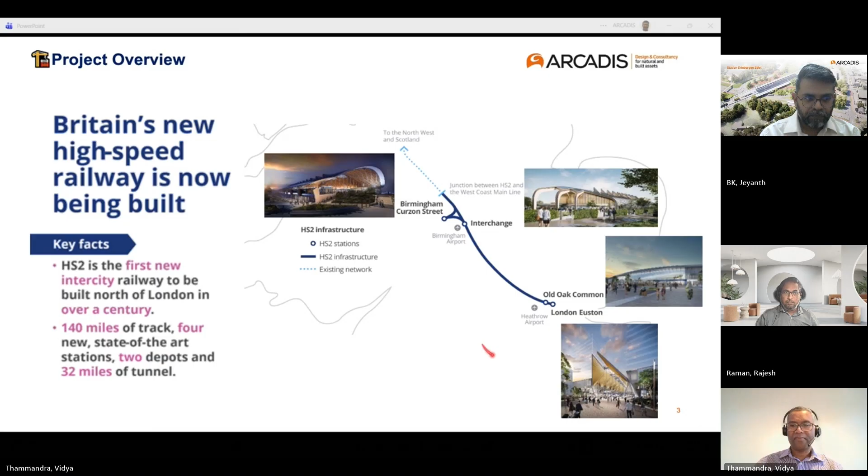This is the architects' expectation of High-Speed 2, this Birmingham Curzon Street station. You can see the Birmingham city skyline in the backdrop. What is striking here is the old Curzon Street station building. Maintaining sightlines to this heritage station building formed a key part of planning consent.

There are 7 lines running from east to west, supported by 4 viaducts. The overall length of this station extent is about 460 meters long. Half of the length on the western side is covered. The western concourse is located above the viaducts, and eastern concourse is located below the viaducts. The station is served by the Midland Metro Alliance tram line, and you have a taxi rank and other services located on the eastern side below the viaducts.

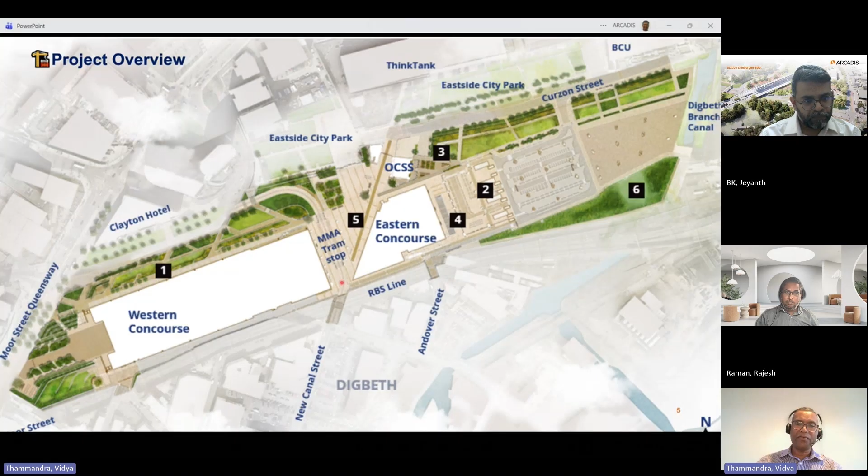This is the site map, and this is the old Curzon Street station building. Maintaining sightlines to this station building from this new Canal Street was a key planning requirement. You have the MMA tram line running north-south, and you have western concourse here and eastern concourse here.

The whole detailed design work package is divided into several sub-packages, and you can see different elements of the station building. At a lower level, you have the control room and key functions essential for running of the station, and it also supports all key building services. On the eastern side, you have the eastern concourse and some back-of-the-house plant, and you have a taxi rank at the eastern end.

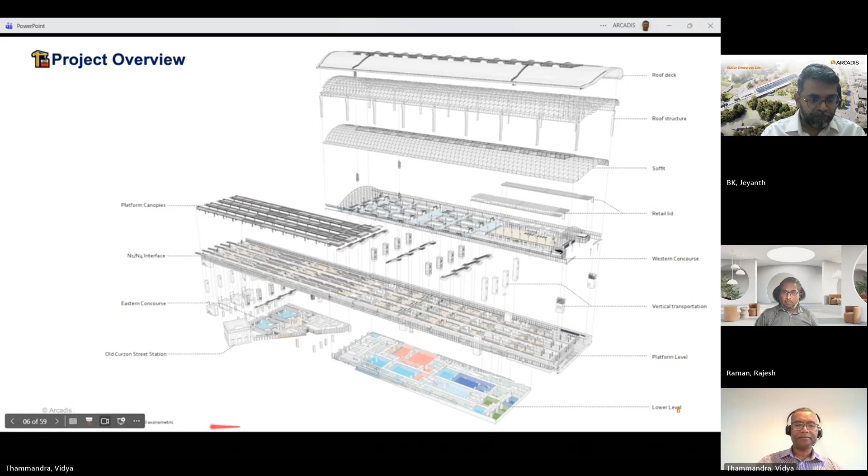This is a structural BIM model. This is a detailed view of the station looking towards west. You have these viaducts formed by precast pre-tensioned U-beams supported by portal piers. Then you have these platforms which are monolithic with the viaduct deck slab, and then you have concourse beams directly resting on diaphragm beams of portal piers. And you have this roof structure which is supported by steel buttress columns supported at the ground level.

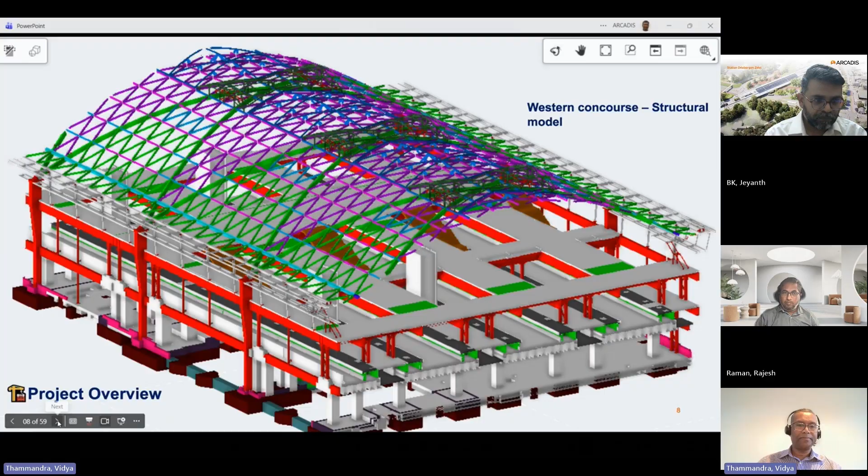This is a section through the building. You can see the viaduct deck cross section here, and these concourse columns, which are located about 5 meters away from the track center, mainly from derailment impact considerations. The platform walls are designed for derailment impact. And you can see the lift shaft here, supported by these edge beams, which run from diaphragm to diaphragm.

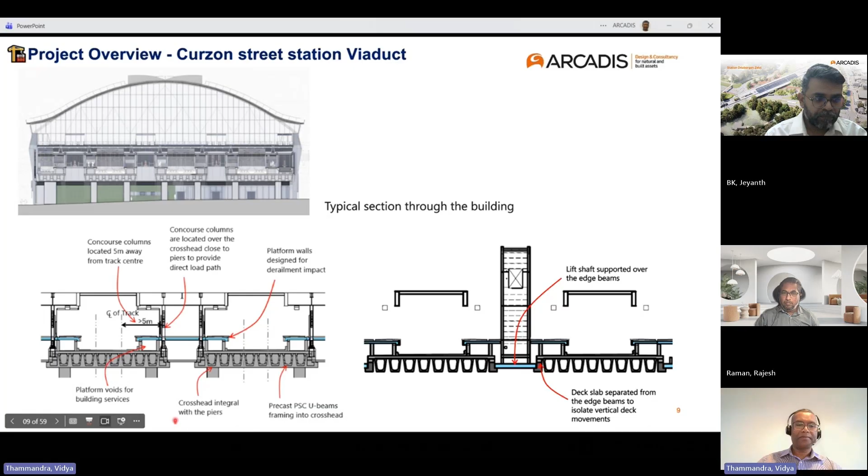This is a bird's eye view of all the viaducts. You have 3 northern viaducts supporting 2 tracks each, and then a southern viaduct supporting 1 track. And you have about a 60-meter length supported by piled rafts. And you have a transition span at the eastern end, which divides the Curzon Street station building, station viaducts, from the approach viaducts.

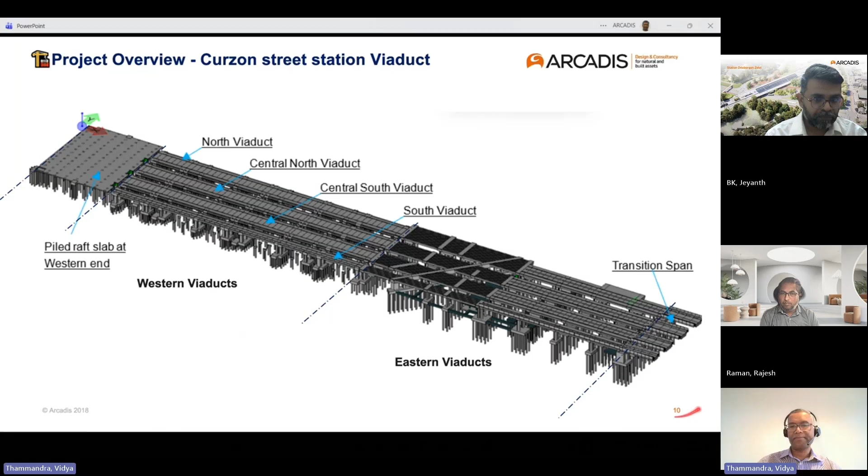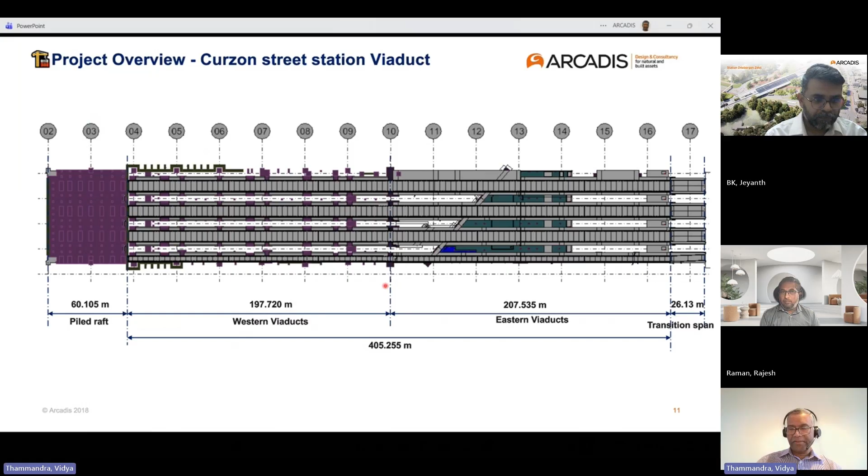This gives the spatial extent of individual viaducts. Western viaducts and eastern viaducts are roughly about 200 meters long. And then you have here the tram line and New Canal Street.

The key requirement was to eliminate bearings inside the station building. So the only place where we could locate the bearings is the junction between eastern and western viaducts here. This is outside the building, next to the tram line, and towards the eastern end of the viaducts, and of course under the transition span.

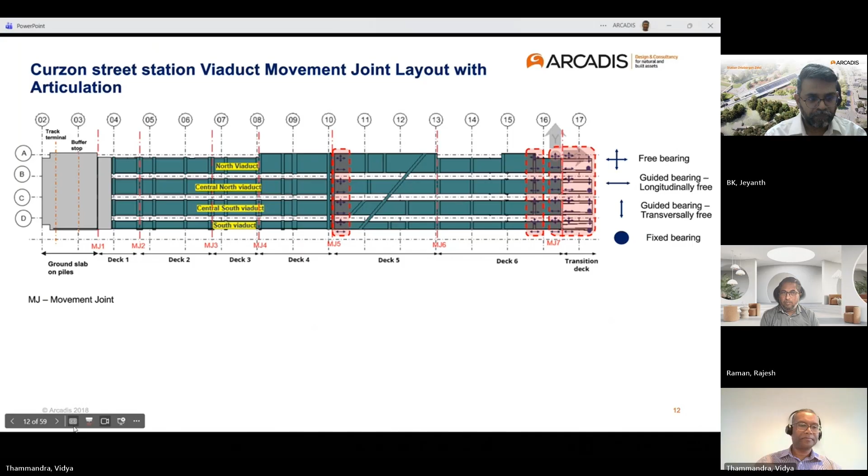This is the longitudinal section. You can see a number of movement joints, particularly on the western side. The movement joints are typically formed by twin columns supported on a shared pile cap.

The only place where we could locate the bearings is at this grid line, which is the junction between the eastern and western viaducts. There's only one movement joint on the eastern side, within the station building. Again, this movement joint is similar to that on the western side, where the deck is integral with the piers on both sides, but the deck itself is separated here. This is the transition span, fixed towards the eastern end and with free bearings on this side.

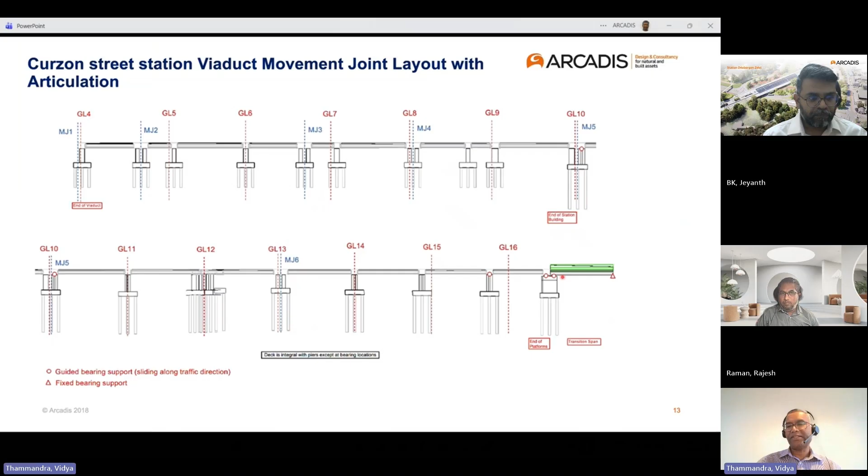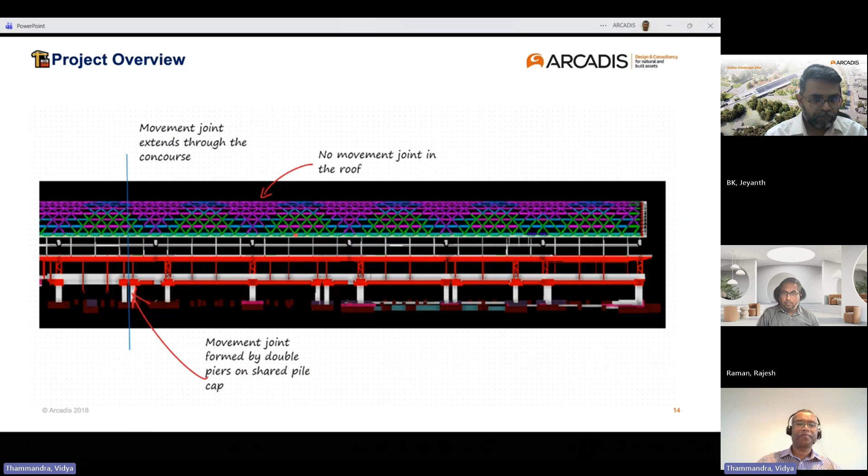The movement joint within the viaduct extends through the concourse, but there is no movement joint in the roof. So this is again a key feature of design.

This shows the typical construction of viaducts, the precast pre-tension beams. They are brought to site, supported on temporary trestles, before they are made integral with diaphragms. Then this span-by-span construction continues from west to east, governed by site constraints.

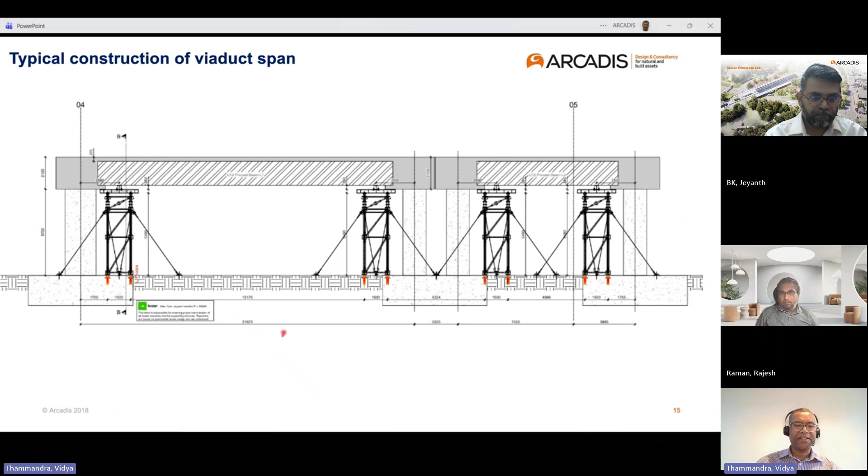As I explained, we need to maintain sight lines to the old Curzon Street station building. So though the columns are located parallel to this New Canal Street, this formed a colonnade and frontage for the eastern concourse.

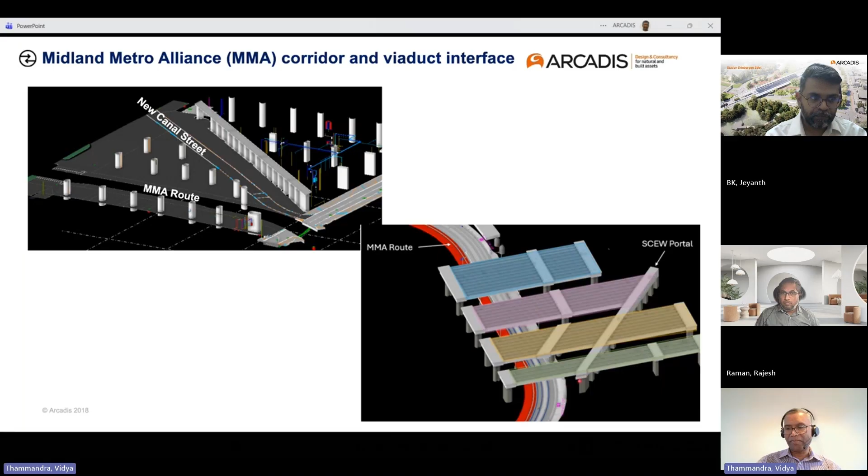Because of the requirement of the tram line, the piers supporting the viaduct are located at a certain distance from the tram line, and the overall arrangement resulted in some skew spans.

This shows a bit in detail. Because the maximum length of the beams that can be transported to site is about 28 meters, we had to come up with some intermediate piers and intermediate diaphragms to break the span.

And because of the arrangement of the piers along New Canal Street, it also resulted in some skew spans. All the substructure and superstructure here is integral, except here where it's located on bearings at the western end of the eastern viaducts.

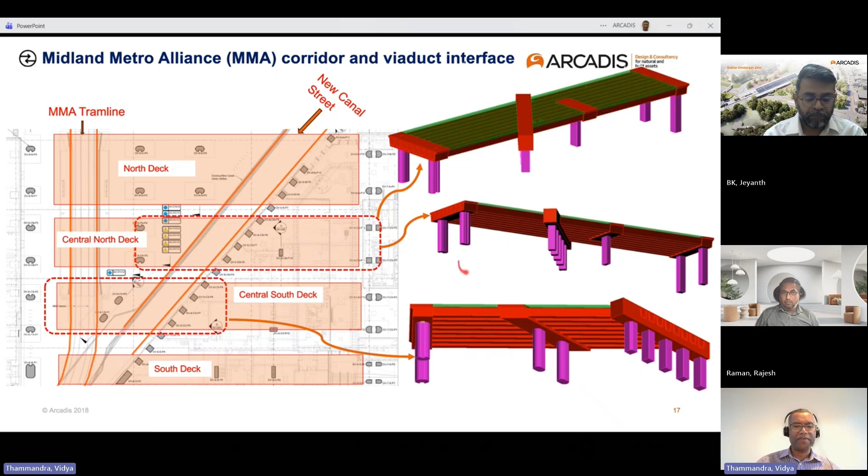This is a cross section of the deck. There is a waterproofing layer in the deck, and a waterproofing protection, like a concrete protection layer, and then a slab track. There's an intermediate layer that directly rests on the concrete protection layer, and then you have the track slab supporting the rails.

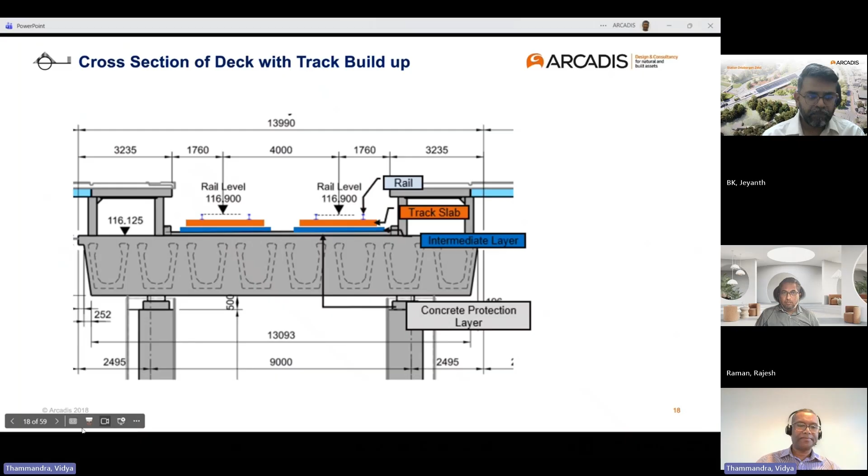This is the design criteria. The design speed is 100 kilometers per hour, so it's not quite a high-speed viaduct designed for high-speed trains. The design criteria is similar to that of any other network rail bridge, because the speed is less than 200 kilometers per hour. Designed for standard LM71 and SW0.

The dynamic loading and natural frequency limits follow EC1-2, except for derailment impact loading, which is governed by HS2 standards. All tracks are continuously welded rail tracks, CWR tracks, with no rail expansion joint within the station limits. This governed all the rail-structure interaction and careful consideration of rail stresses.

It's integral construction, with no bearings inside the station building. That required challenges associated with the temperature loading, creep, shrinkage, and all those effects.

Again, the western part of the station, because of the expected potential rise of groundwater level, is designed as a grade 3 basement. So the basement slab is integrated with the pile caps of the viaducts, and that was again another design challenge.

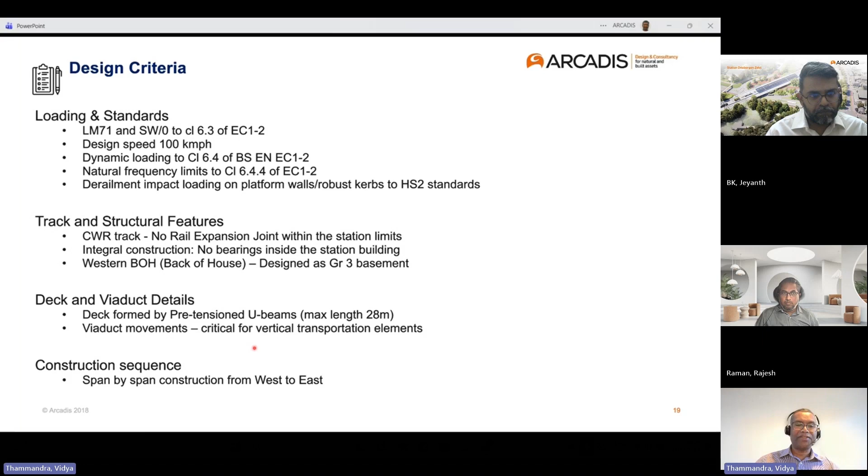Because of the integral construction, temperature loading governed the design. To mitigate those temperature load effects, we proposed a concrete mix with limestone aggregate, which allows the use of a reduced coefficient of thermal expansion compared to normal aggregate.

Because of the size of the concrete elements and the seasonal nature of the temperature effects, we proposed to use a long-term modulus equal to 75% of the short-term modulus. This is suggested in a book by Robert Benaim - you can see the reference here.

We built this into the AIP and got approval from HS2. Because the whole viaduct structure comprises reinforced concrete and pre-stressed elements, using reduced, cracked stiffness for RC elements - mainly the piers and diaphragms - also helped to come up with realistic temperature loading. Also, for long-term load cases like differential settlement and long-term shrinkage, we used a long-term Young's modulus considering creep.

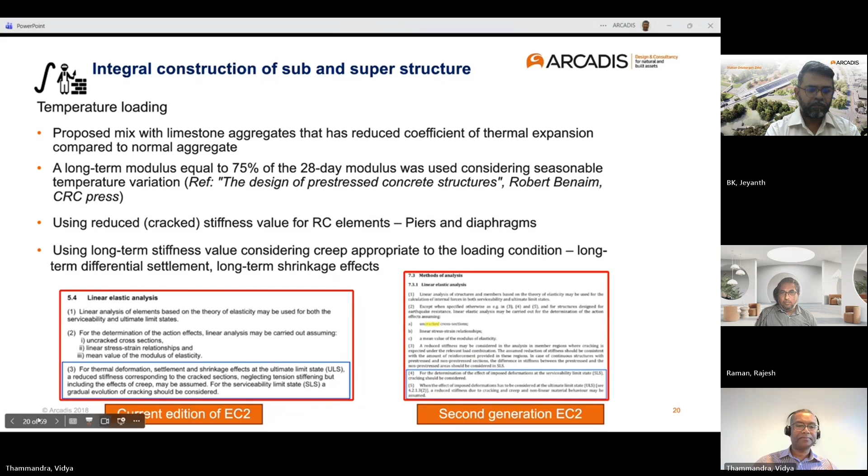I'll now give it to Rajesh to take you through the modeling strategy and global analysis.

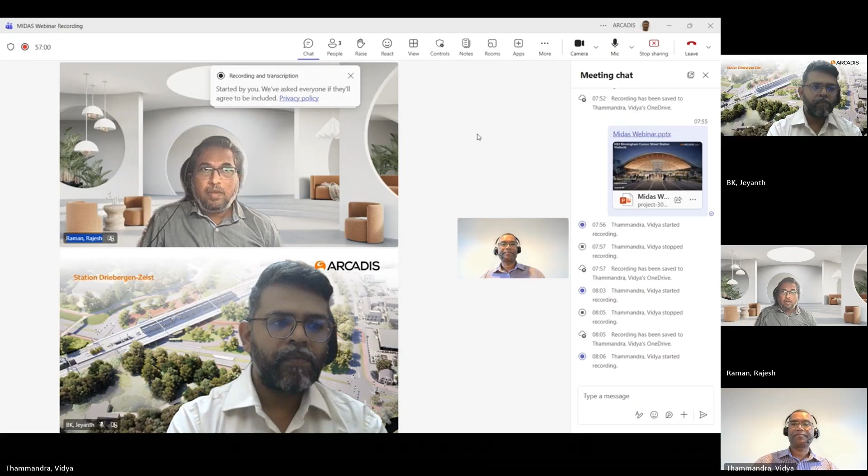You can request control, Rajesh. Requested. Yeah, okay. You can see, right? Yeah.

Thanks, Vidya, for this. I'll be taking you through this modeling strategy and the workflow of global analysis.

As explained earlier, the structure is bifurcated into eastern and western sections. This is the western viaduct, which has a total length of around 195 meters, separated by movement joints at 3 locations. The maximum integral span is around 65 meters here, as this entire viaduct stretches within the station building. No bearings are provided, and the piers are either square or rectangular in shape.

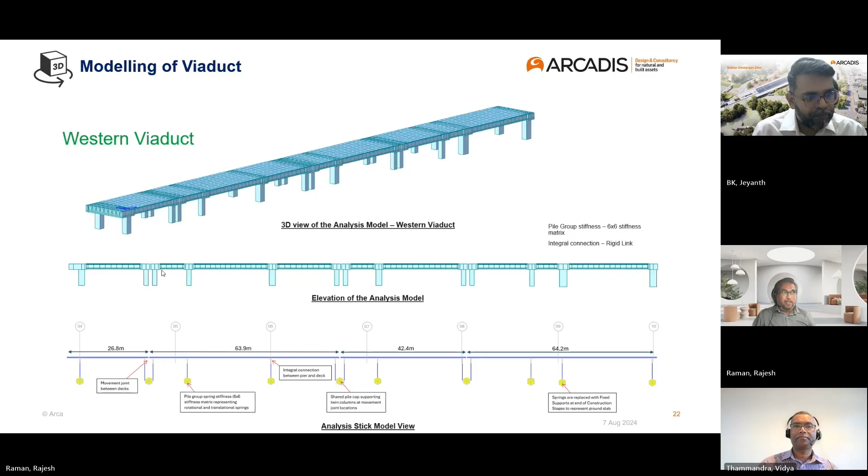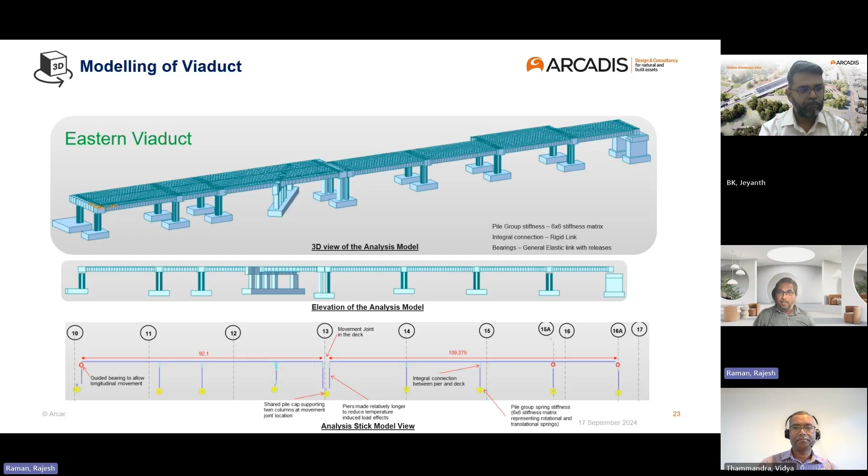This is the model showing the eastern viaduct. Here there are some spans with skewed diaphragm and pier due to the existence of canal street, highway, and tram line passing below. The total length is around 200 meters with a maximum integral length of 90 meters. In this viaduct, the bearings are proposed at locations outside the station premises. Also, the pier shapes are governed by aesthetics to accommodate drainage and downpipes.

All this viaduct configuration was modeled using MIDAS Civil with a combination of grillage and finite element techniques to capture the structural behavior accurately. So this is the grillage model snips.

This consisted of pile caps, piers, and diaphragms, all modeled using beam elements. The deck system was simulated as a composite element integrating precast U-beams with cast-in-situ deck slab to reflect the composite action. Plate elements were also used, incorporated solely to facilitate accurate load distribution to longitudinal beams without contributing to global stiffness.

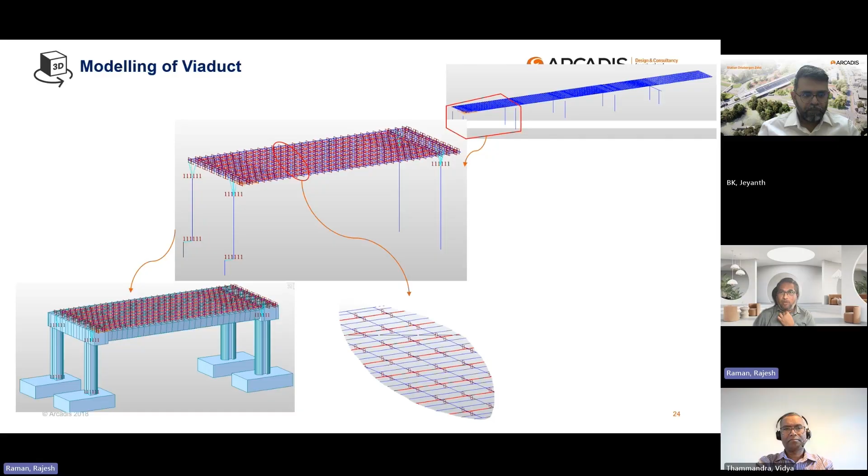The material properties accounted for concrete's time-dependent behavior, capturing creep, shrinkage, and age-dependent modulus. Boundary conditions were modeled using a pile 6 by 6 stiffness matrix. The connections at integral locations were modeled with rigid links, and at bearing locations, with elastic links. At the beam-deck interface, elastic links were provided to simulate interaction and accommodate differential behavior, which I'll show on this slide.

Post-deck, after the deck is cast, elastic links are introduced between the beam nodes from the longitudinal grillage and the deck nodes. These links act as stiff transverse outriggers, as you can see here, enabling effective load sharing across adjacent beams. This modeling approach ensures uniform distribution of transverse loads across the longitudinal beams, enhancing structural efficiency and serviceability.

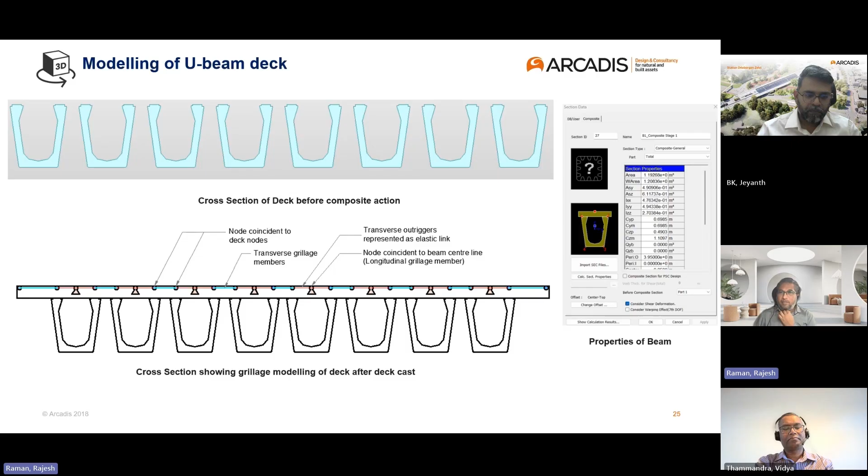This methodology is consistent with principles outlined in E.C. Hambly's bridge deck behaviour. This is an isometric view of one of the four-span viaducts analyzed.

To simulate realistic structural behavior under service and ultimate conditions, cracked stiffness properties were incorporated into the model. Piers and diaphragms were assigned cracked stiffness throughout the analysis to reflect reduced flexural rigidity due to cracking under sustained loading. For the deck slab, cracked stiffness was applied only under ultimate limit state conditions, aligning with design code provisions and ensuring a conservative assessment of load effects.

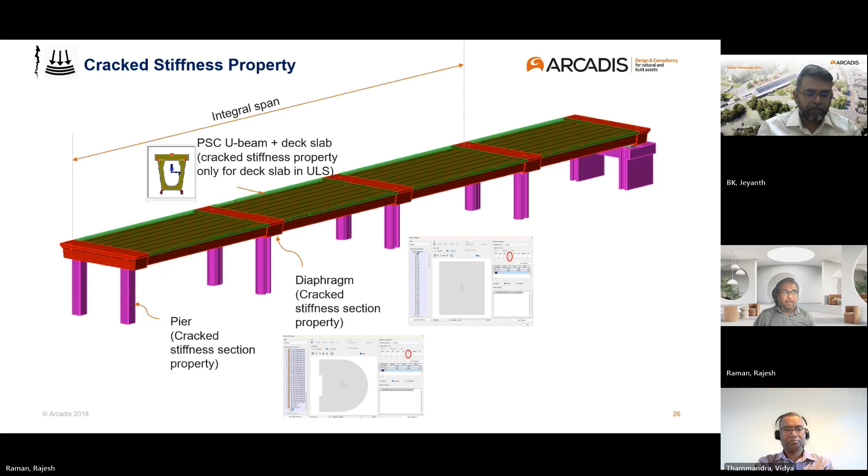The pile group beneath each pier was modeled using a 6 by 6 stiffness matrix within the general spring supports framework in MIDAS Civil, accounting for 3 translational and 3 rotational degrees of freedom. We carried out a sensitivity analysis to account for uncertainties in soil stiffness and pile-soil interaction, with a lower bound stiffness of -30% and upper bound stiffness of +30%. These bounds were analyzed using actual spring elements in MIDAS to evaluate the impact on global structural response and foundation performance.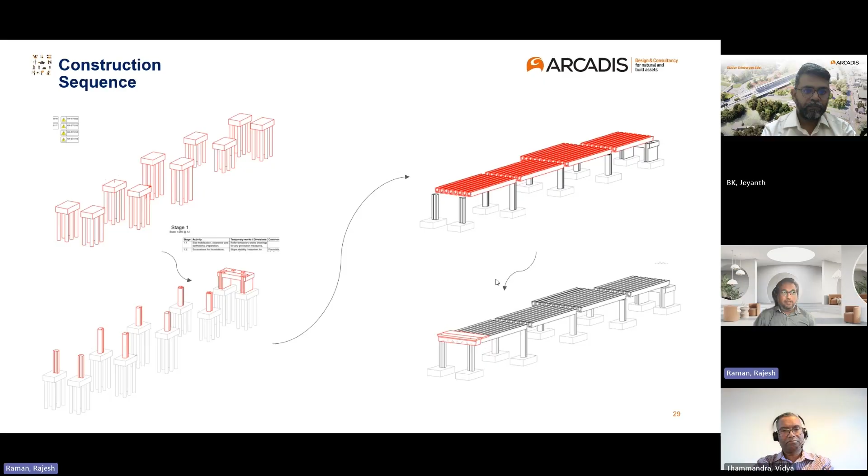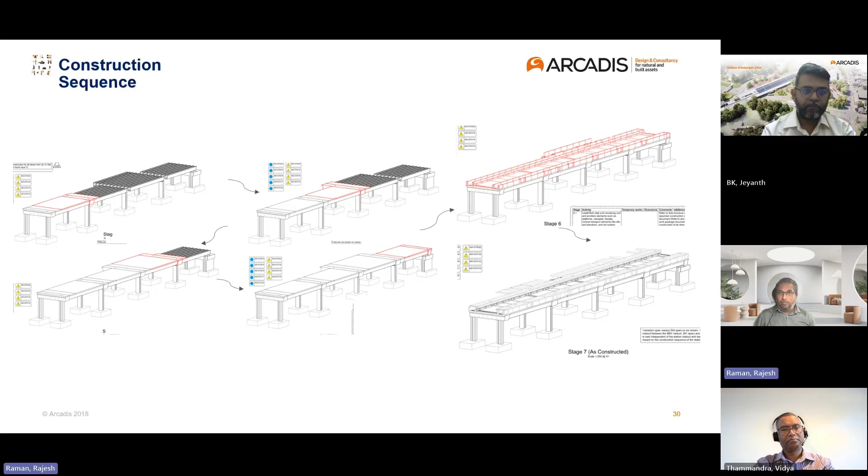The first stage of casting is the diaphragm and part of the deck, up to 1/5 of the span. The next stage is the remainder of the deck for that span, along with the diaphragm and part of the deck of the next span, and so on.

These are snips from one of the analysis models wherein construction sequence tools from MIDAS software are used. It can be seen that the sequence in the BIM model is aligned with the design. Here the pin supports, which are temporary supports, are activated for the beams and then deactivated as the diaphragms and deck achieve their desired strength.

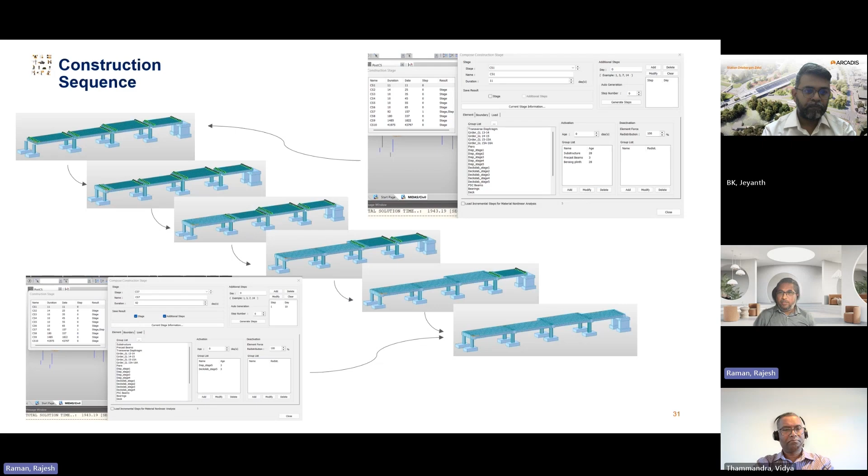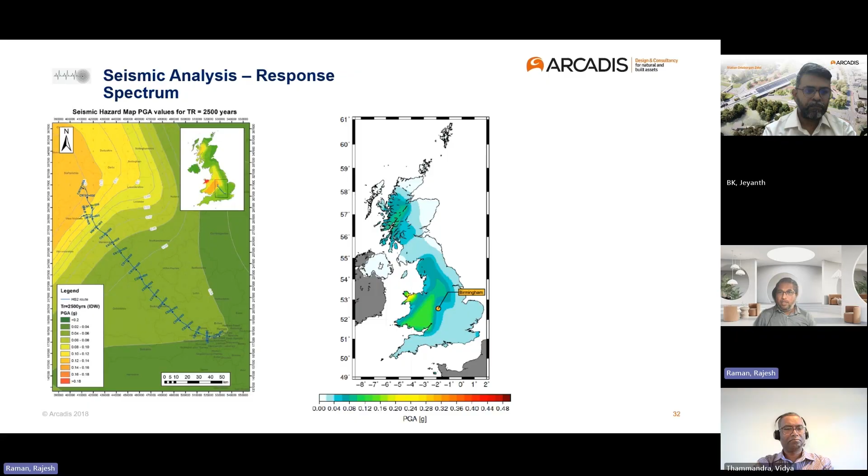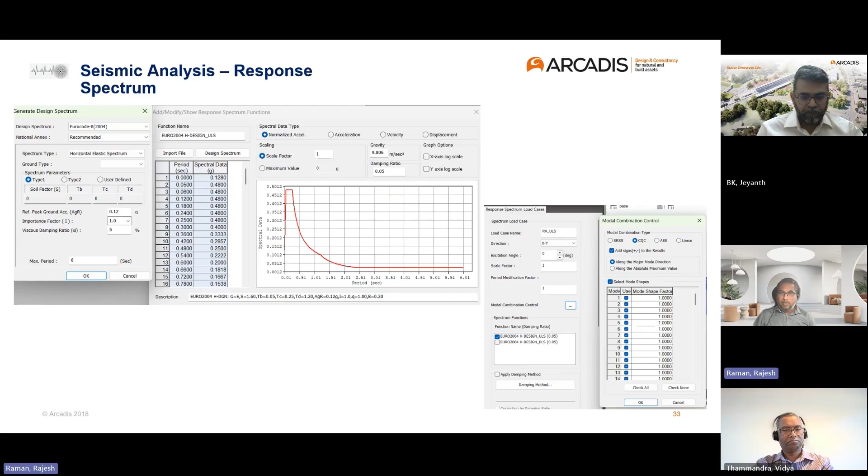The viaduct structures were analyzed for seismic loading in accordance with the relevant UK design standard, including seismic hazard mapping. A response spectrum analysis was conducted using MIDAS Civil to evaluate the structure's dynamic response under seismic excitation. Site-specific response spectra were generated based on peak ground acceleration values and soil classification, ensuring accurate representation of seismic demand. This approach allows assessment of modal contributions, base shear, and displacement profile under seismic conditions, ensuring compliance with performance criteria for critical infrastructure.

To address the transverse behavior and ensure accurate simulation of deck performance, a full 3D finite element model was developed using plate elements. The model provides a detailed representation of the deck geometry, including slab thickness, diaphragm, and beam spacing. Plate elements were used to capture bending, membrane, and shear effects in both longitudinal and transverse directions.

Accidental loads were also considered, including train derailment loads applied transversely to simulate impact loading and eccentric loading conditions. These scenarios were analyzed to verify structural robustness and compliance with safety requirements under extreme events. This modeling approach ensures that both serviceability and ultimate limit state criteria are met, while also validating the deck's resilience against accidental transverse loads.

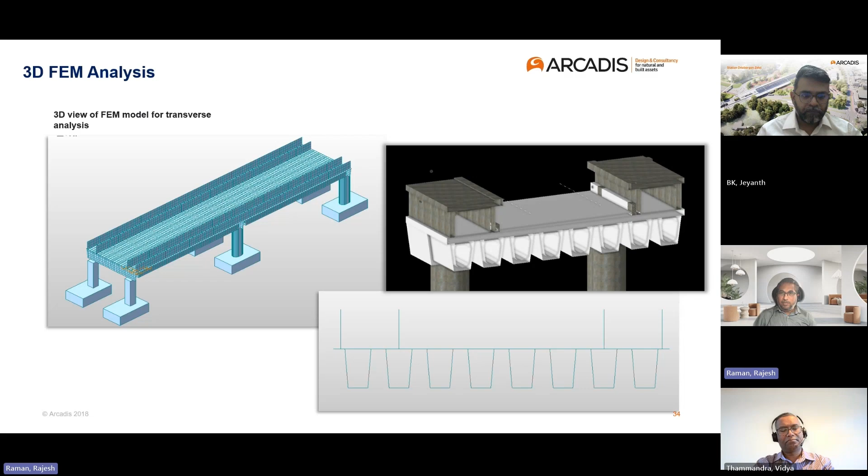This is the interface span connecting the mainline viaduct and the station viaduct to the approach span viaduct. It is constructed as a cast-in-situ, simply supported, cast-in-situ multicellular reinforced concrete deck. Unlike the station viaduct span, which utilizes precast pre-stressed composite decks, this interface span adopts a monolithic RC construction to accommodate geometric and structural continuity.

The span geometry and structural detailing are aligned with the BBV approach viaducts, ensuring seamless integration in terms of profile and load path continuity.

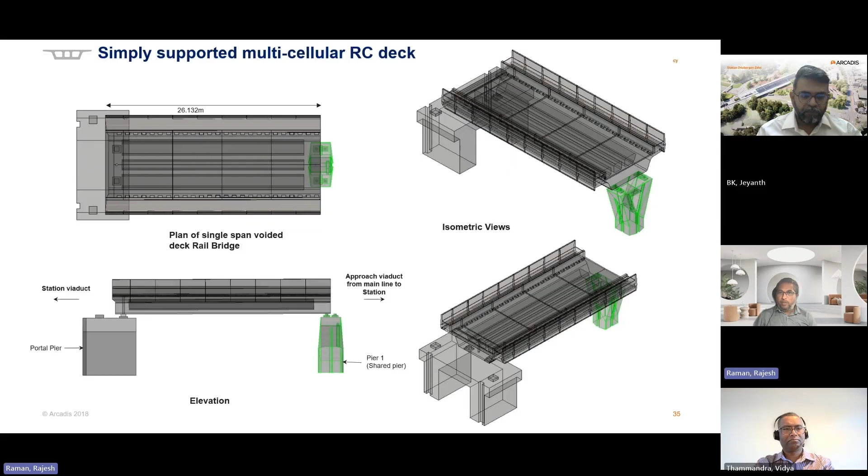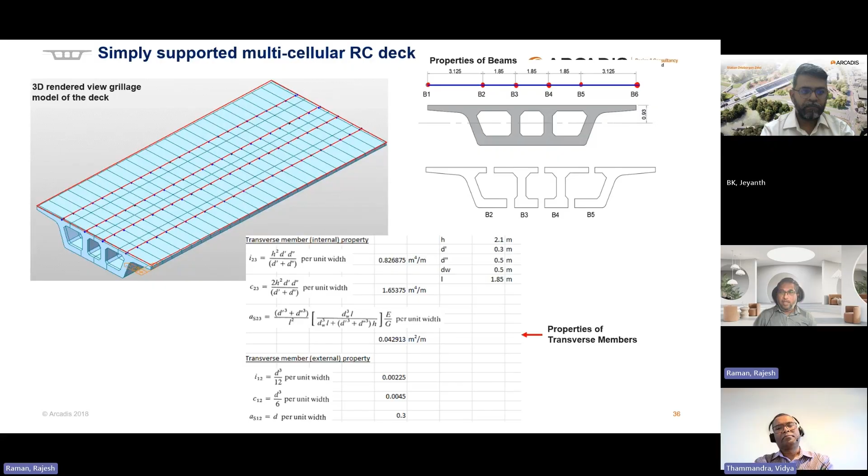This slide presents a simplified view of the grillage model used for structural analysis. The longitudinal grillage members were positioned such that the centroid of each member aligns with the centroid of the overall deck cross section. This alignment ensures accurate representation of bending stiffness and load path continuity in the longitudinal direction. Transverse member properties were based on the principles outlined in EC Hambly's bridge deck behavior.

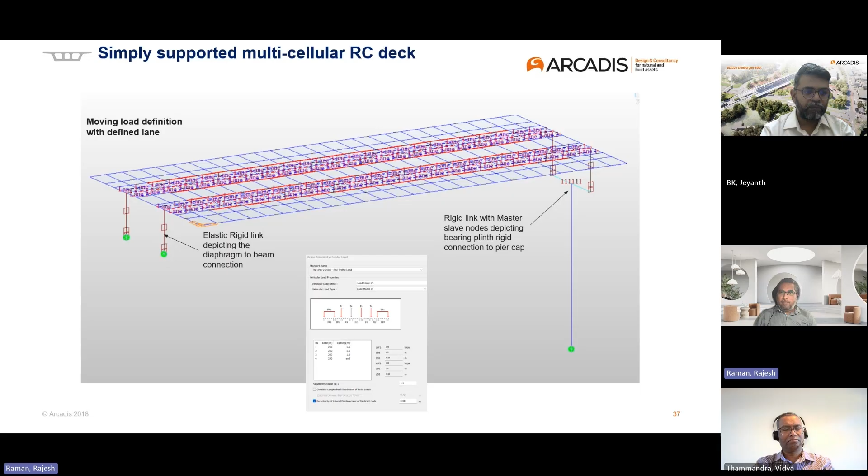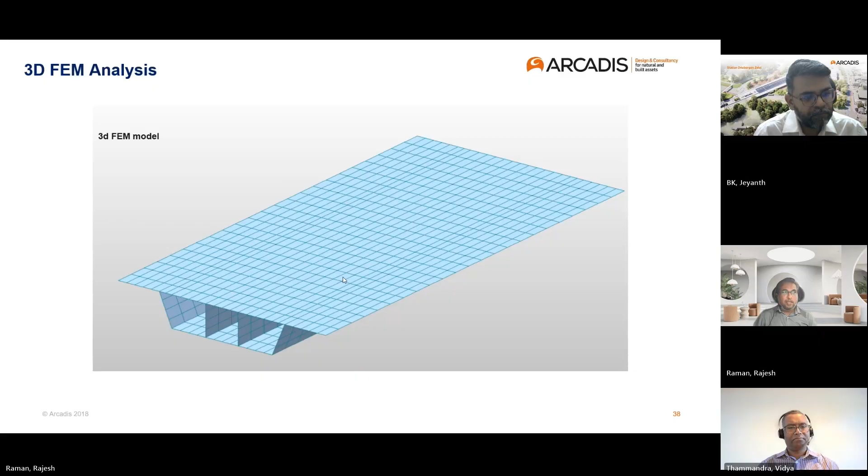There were additional checks carried out to ensure structural adequacy on the outer web of the deck, in accordance with BS EN 1992 of Eurocode, design of concrete structures for bridges, specifically Annex MM. These results were extracted from the 3D FEM plate model. This check reinforces the robustness of the design, particularly in regions vulnerable to lateral and eccentric loading.

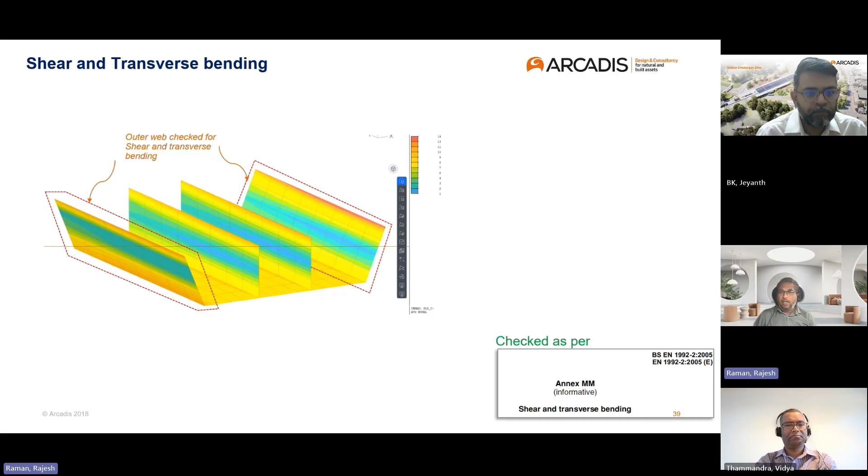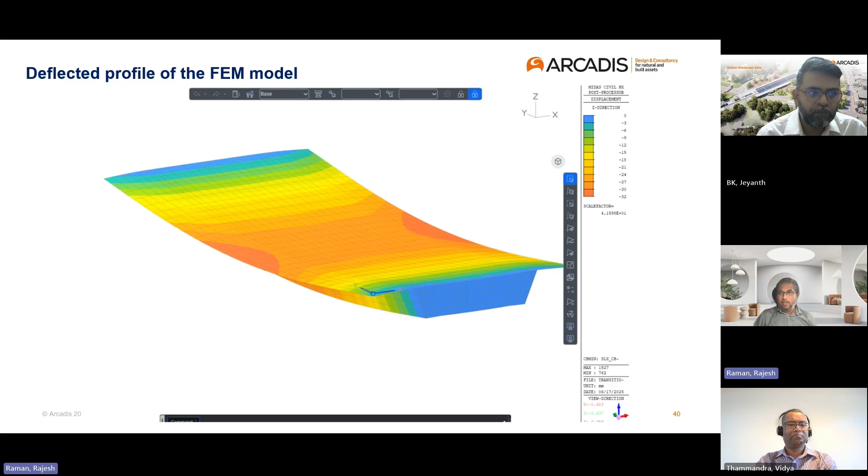This is the 3D image of the FEM model showing displacement, which was very essential as this was a multidisciplinary project. These SLS displacements were very crucial for other services. That's it for the modeling.

I'll now hand over to Jeyanth, who will be taking forward the discussion on rail structure interactions.

The aspects related to rail structure interaction analysis for Curzon Street Station Viaduct. A brief introduction on rail structure interaction analysis, why we need to perform it, before going into the analysis performed for Curzon Street Station Viaduct. In this analysis, we check the additional stresses generated in the rail, the deck displacements, and the additional forces the substructure is subjected to due to this interaction.

These additional forces or stresses generated in the rail happen because the rail is continuous over the bridge deck movement joints. So essentially, when the bridge deck moves due to variable actions such as temperature or vertical load, it tries to pull the rail along with it.

This is resisted by the continuity of the rail and the rail being held by fasteners in a ballastless track system, or by the ballast in a ballasted track system. Due to this, the resistance happens until the rail slips once it exceeds the fastener or ballast capacity. Until that point, force will be generated in each fastener, and this force builds up, which is how the force gets generated in the rail.

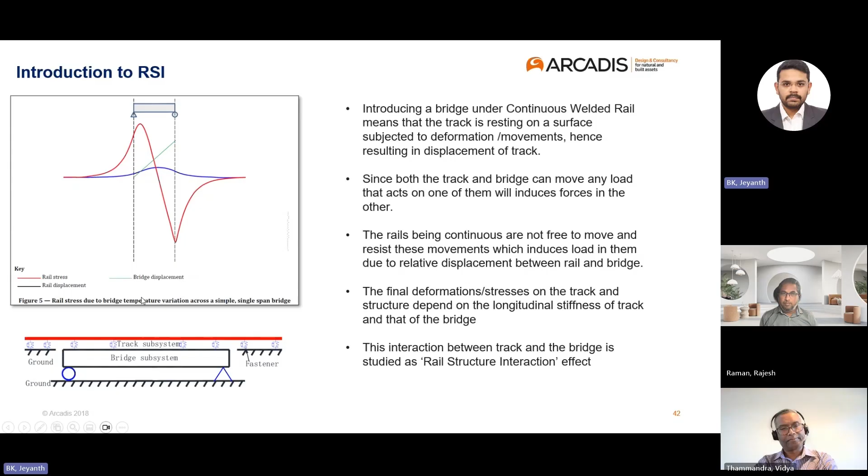That's a short brief on the background to the rail structure interaction analysis.

For rail structure interaction analysis, we refer to a number of documents. Essentially, the UIC standards and the Eurocode standards are helpful in this. In UIC, we refer to 774-3R, which forms the background to the Eurocode standard covering the ballasted system. For a ballastless track system, we have the UIC recommendation for design and calculation of ballastless track.

In Eurocode, we refer to BS EN 1991-2, and also the newly published document 17231. I'd like to emphasize the new published document 17231, as it covers in detail the background and concepts of rail structure interaction analysis. It also has the revised provisions to be incorporated in the next update of 1991 Part 2.

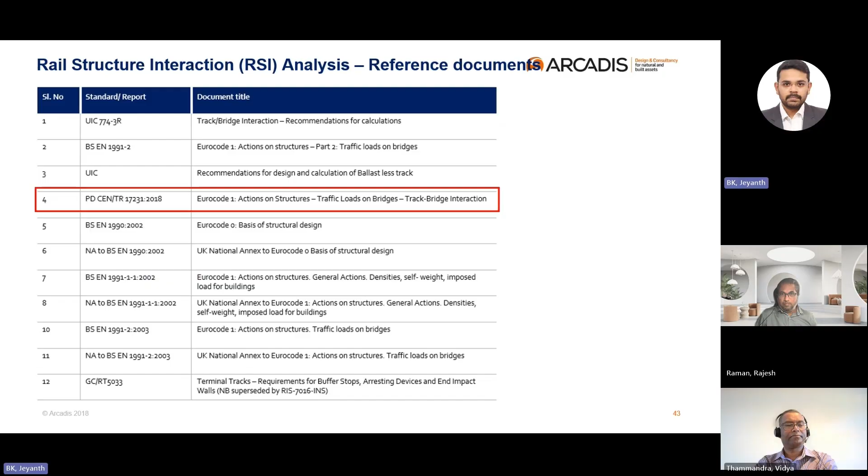We saw earlier a brief covering the deck movement joint. Here I'll be talking specifically on the rails.

The rails are continuous for the full extent of Curzon Street Station Viaduct, from grid line 2, about 10 meters from grid line 2, till the end near grid line 17, at this transition span. The overall length of the rail is about 481 meters.

The scope of rail structure interaction analysis for Curzon Street Station Viaduct was to get the additional stresses in the rail within this extent of 481.34 meters. The buffer stop is at a distance of about 20 meters from the track terminal point.

Also, the rails are not just continuous over the bridge deck expansion joint within the Curzon Street Viaduct, it's also continuous into the approach viaduct, that's the N1 viaduct.

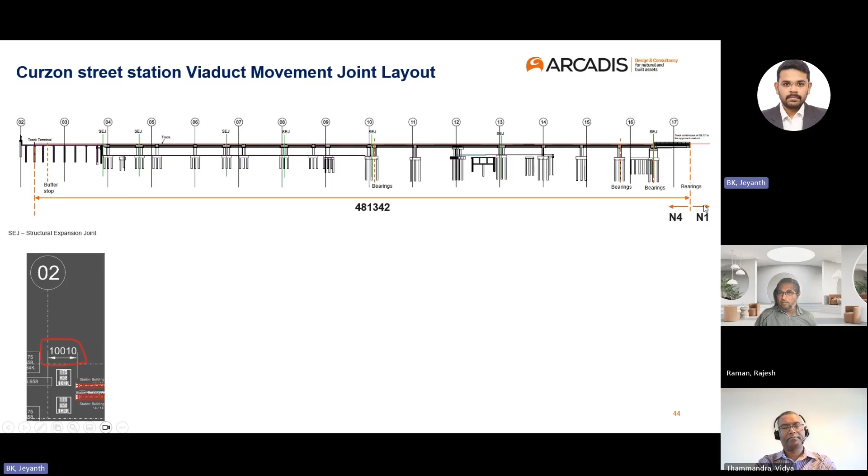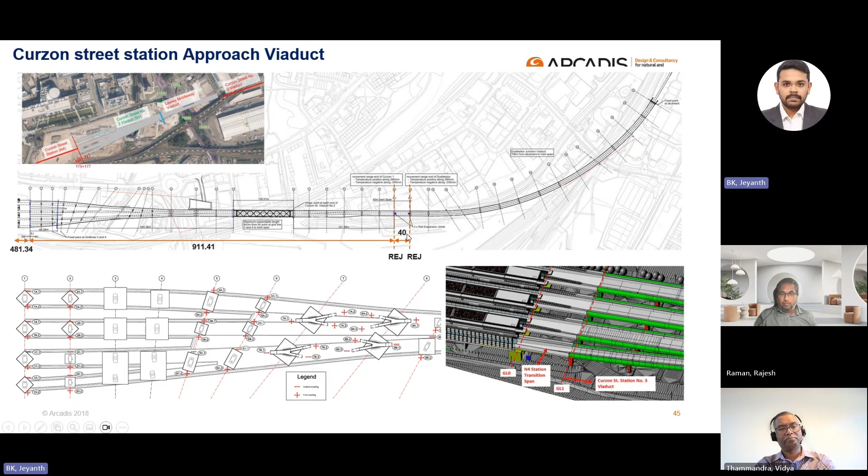Coming to the articulation of the approach viaduct, I'll be covering only this extent of 911 meters. Over this length, it's all continuous, except near grid line 3 and 4, about 40 to 50 meters from the transition pier location. For this full extent, it is longitudinally fixed at grid line 3 and 4.

Now, if you look at it overall, including the Curzon Street Viaduct, the rails are continuous starting from the track terminal point till it goes to the approach viaduct for a length of 911 meters. So if you combine both, you can say the rails are continuous for a length of about 1,392 meters.

This again covers the articulation of the approach viaduct, which I spoke about in the last slide.

Now, for Curzon Street Station Viaduct, because the rails are not on embankment but on the approach viaduct, we have to model the approach viaduct, because it impacts the rail structure interaction analysis for the Curzon Street Viaduct also. We have to decide to what extent we should model the approach viaduct - should we model the entire 911 meters, or is only a certain extent sufficient?

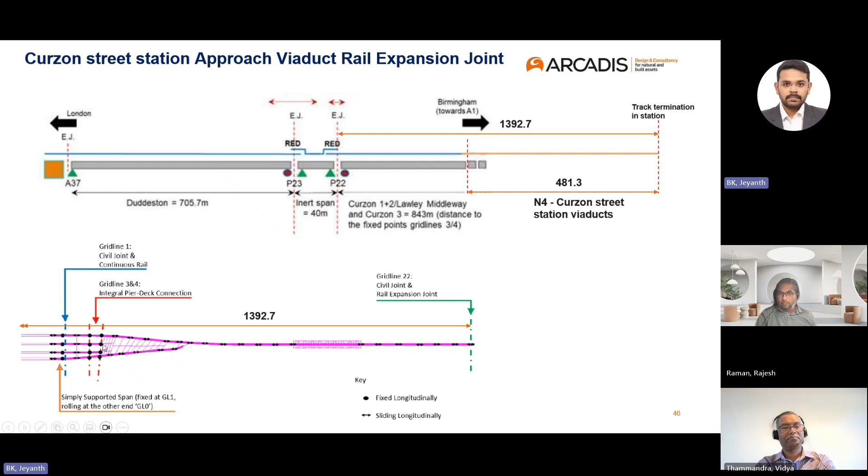So we went first with a sensitivity study, modeling two approach lengths of 100 meters and 250 meters. From this sensitivity study, what we noticed was the stresses in the rail for the Curzon Street Viaduct, or the changes, were very negligible between both the 100 and 250 meter lengths of the approach viaduct considered in the analysis. The reason being, the approach viaduct is longitudinally fixed between grid line 3 and 4 in both the 100 and 250 meter length analyses.

We considered this longitudinal fixity, so the displacements of the deck near the Curzon Street Viaduct was accurately considered in both of these models. There was not much change in the stresses in the rail for the Curzon Street Viaduct, so we went with an approach length of 100 meters. For the sensitivity analysis, we considered for the approach viaduct all the stiffness - ground stiffness, substructure stiffness, and superstructure stiffness of the approach viaduct.

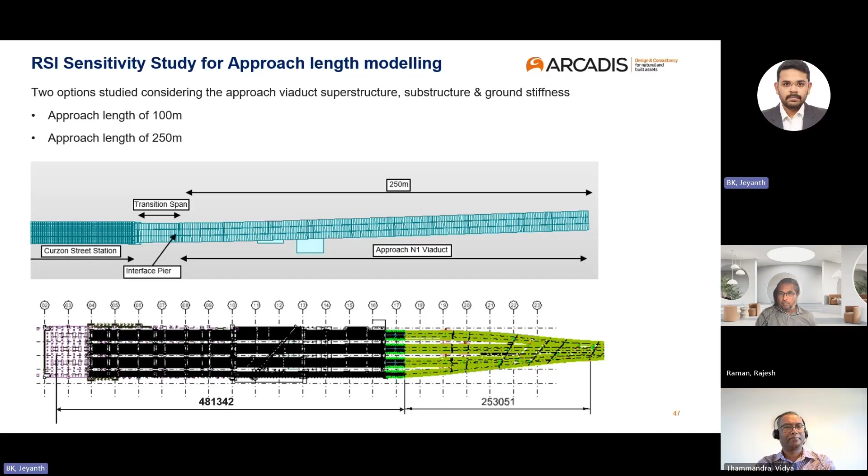Coming into some of the assumptions we had for the rail structure interaction analysis for Curzon Street Viaduct. Modeling of the approach viaduct, as covered in the last slide, we took it to be 100 meters based on the sensitivity study.

Now, for the track termination at grid line 2, the track is free to expand and contract. So the track termination point was considered similar to a rail expansion joint where it can freely expand or contract. For the buffer stop, located near the track terminal point, the fasteners would be closely spaced near the buffer stop. So for both loaded or unloaded condition, the longitudinal stiffness, that is the fastener stiffness, was taken to be 60 kilonewton per meter because the fasteners are closely spaced.

This analysis being done within a station environment, braking and traction can occur in either of the tracks. So we considered a scenario where braking can occur in both tracks, or traction in both tracks, or braking or traction in one of the tracks, and took the worst cases for our analysis and checks.

Creep and shrinkage: the residual creep and shrinkage effects were considered. That's the creep and shrinkage occurring in the deck after the rails are installed, which are considered in the analysis.

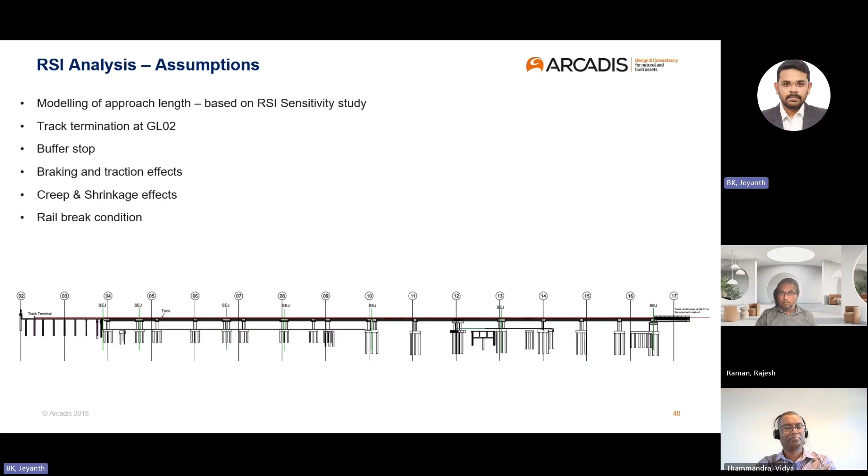The rail break analysis also was required to be performed here, because we had gone through a departure route, which I'll cover later down in the slides.

For the analytical model geometry, a grillage for the substructure stick model was considered - that's a line beam element, and for the superstructure also a line beam element, but a grillage model was generated. That's for both viaducts and the pile raft. Between grid line 2 to 4, it's pile raft, so for that also a grillage model was considered. For the transition span and the approach viaduct, it's a voided deck, so line beam was considered for the analysis.

For the analysis, the entire substructure ground stiffness was considered, and the pile cap was modeled, including the tracks. Each track has 2 rails, so it was combined and modeled as a single line with the property accordingly modified.

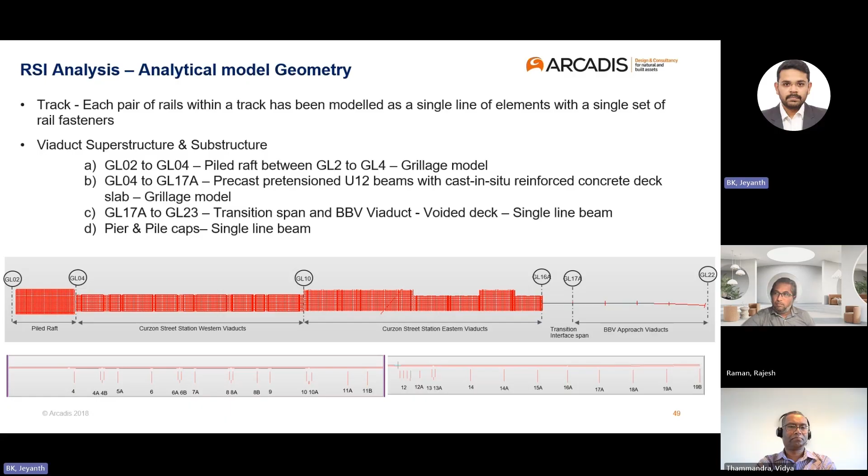The depth of the deck was considered in the analysis, and the eccentricity of the rail from the top of the deck was also considered. This is necessary to accurately get the stresses in the rail due to deck end rotation.

Between the rail and the deck, a bilinear spring was considered to model the longitudinal fastener resistance. This is the property of the bilinear spring: up to a certain displacement, it varies linearly, and then it slips, and the force remains constant in the spring. Here we have the loaded stiffness of 60 kilonewton per meter, and the unloaded is 30 kilonewton per meter. This is taken as per the HS2 standard requirement.

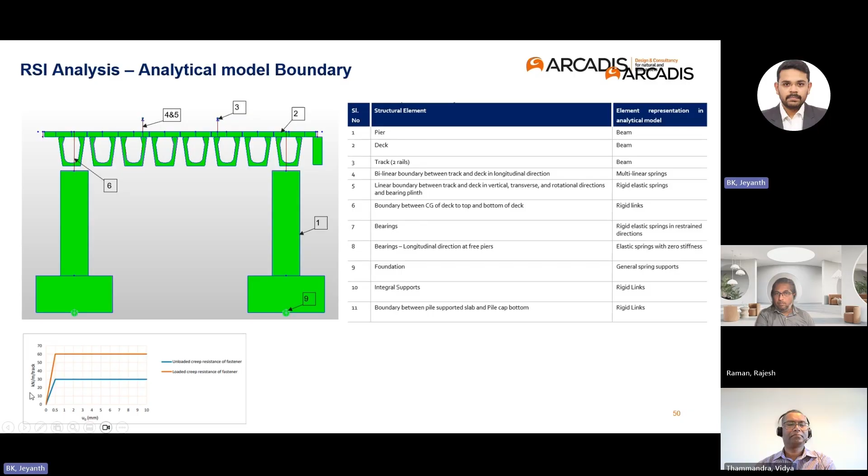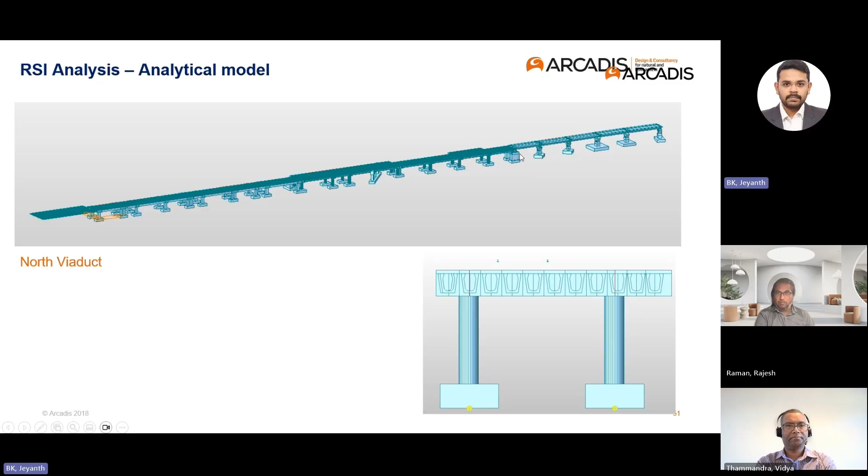This is a view of the North Viaduct 2-track viaduct model. You can see the full extent model from grid line 2 to grid line 17 - that's the Curzon Street Viaduct, and then the approach viaduct spans. This is the transition span, and this is a cross-sectional view.

This is a single track viaduct, South Viaduct. Here again, the full entire Curzon Street Viaduct, including the pile raft, was modeled with the approach viaducts.

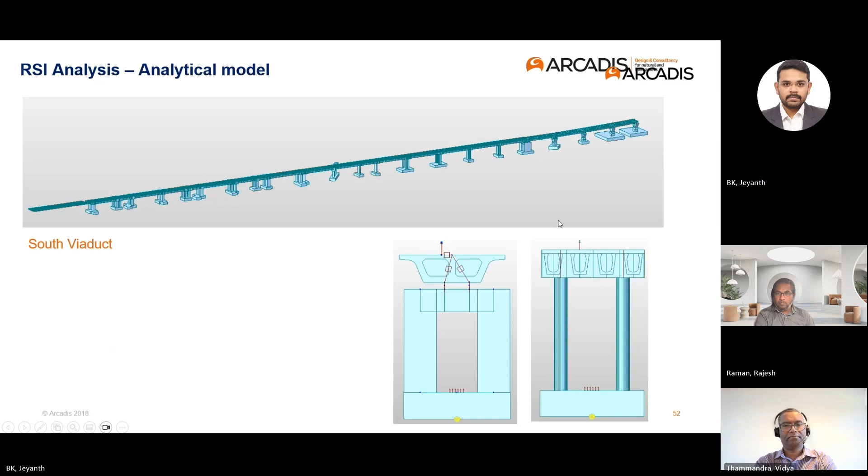The rail break analysis model is similar to the rail structure interaction analysis model. It's essentially the same model. The only difference is we intentionally introduce a gap in the rail where we expect the maximum tensile stresses to occur.

Because at this location we will have the maximum gap being generated. For the rail break analysis, it's an accidental scenario, so we consider only the temperature action on both the rail and the bridge system. We don't take any live load into account. This is as per the Eurocode requirement.

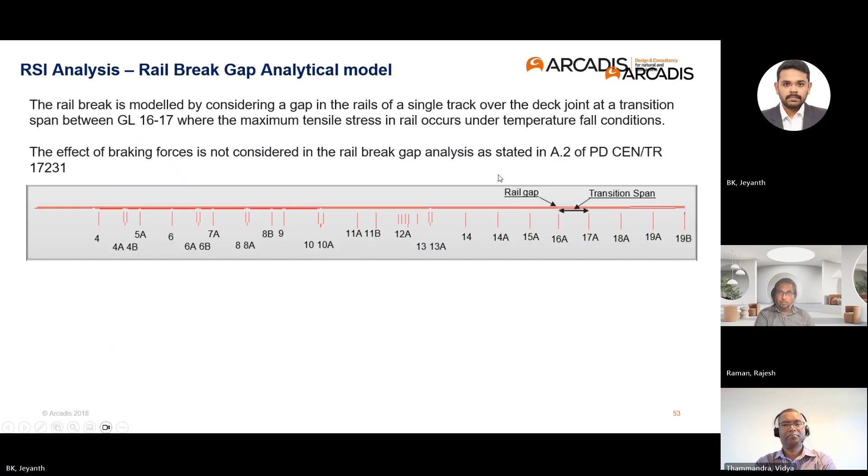The design criteria, we check the deck end displacements and the stresses in the rail. Now on to the deck end displacement.

The first check is the longitudinal displacement due to braking and traction that occurs at the bridge deck ends. The limit is 5 mm when the rail is continuous.

And then the longitudinal displacement at the deck end due to the vertical live loads. This is generated due to the rotation of the deck. Here the limit is 8 mm as per Eurocode standard.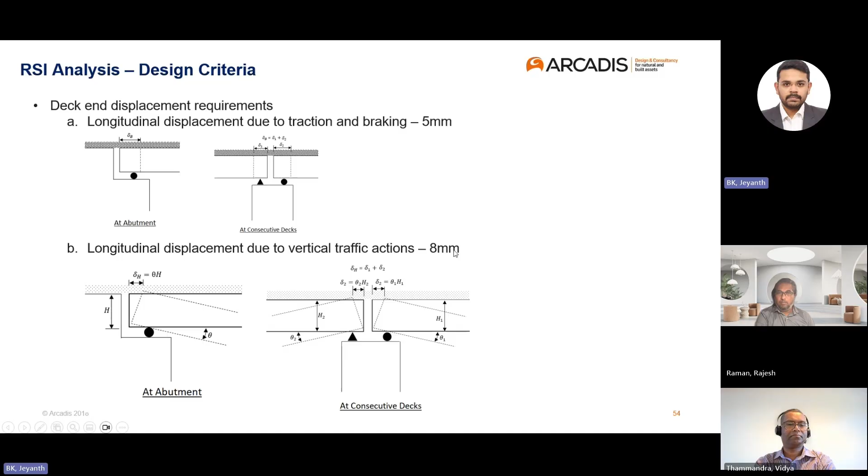And then the vertical displacement of the deck due to variable action. The limit is 3 mm when the speed is less than 160 kilometers per hour, again as per Eurocode. Now these deck-end displacements are checked.

What is given in Eurocode 1991 Part 2 is for ballasted track systems, but PD 17231 states to use the same limit for the ballastless track system. So for Curzon Street station, the rails are on a slab track system, which is a ballastless track system. The same limits were followed.

For the ballastless track system, there are some additional requirements to be checked: the deck end rotations, both at the ends and at intermediate locations, and also the lateral deformation of the deck at the deck ends, where the bridge deck expansion joints are located.

So there are limits given in the HS2 standards for this, and these were also checked in addition to the bridge deck end limits given in Eurocode 1991 Part 2. For the rail break, the maximum gap limit is 90 mm, recommended by HS2.

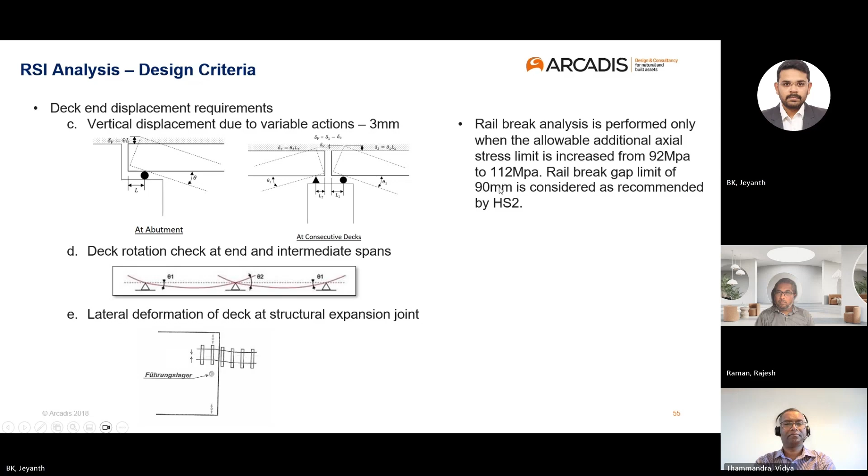Coming to the axial stress in the rail, the axial stress in the rail for the ballastless track system is 92 MPa as per the UIC standard.

For Curzon Street station, we had gone through a departure route which was accepted by HS2 with a limit of 112 MPa. This limit could be followed when we do a complete analysis by considering the eccentricity of the rail with respect to the CG of the deck.

When we consider this in the analytical model, we will be accurately interpreting the stresses in the rail due to deck end rotations. When the deck is rotating, there'll be some horizontal movement generated at the deck top level and at the rail level due to this eccentricity, and that movement will lead to additional stress in the rail.

So when we account for these eccentricities in the analytical model, we will be accurately calculating the actual stresses in the rail due to the deck end rotations coming from the temperature gradient or the vertical live load. So the limit of 112 MPa can be followed.

Since in Curzon Street station viaduct we accounted for these, we used the limit of 112 MPa. The background of this limit is just the additional stresses in the rail when the rail passes over a bridge. This is not the overall allowable stress in the rail.

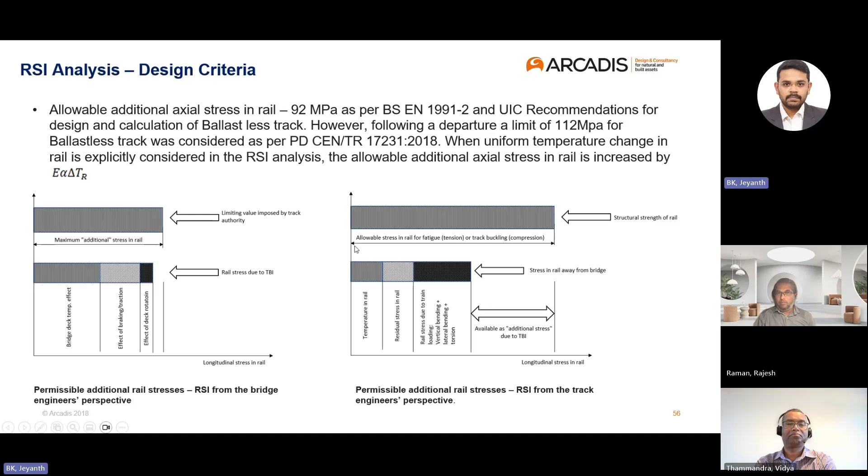One thing to note here is when we take account of the rail temperature action, the stresses in the rail is not just 112 MPa or 92 MPa. It will be 112 or 92 MPa plus the stress in the rail generated due to the temperature change in the rail, because these additional stresses don't account for the temperature in the rail. The temperature in the rail is already accounted for in the rail system engineer's design. So since we are now adding this into our analysis, we can enhance or increase the limit by that extent, that's the stress in the rail generated due to temperature change of rail.

And then the other loadings: temperature gradient and residual creep and shrinkage actions, braking interaction, and vertical live load. As I covered earlier, for rail break analysis it's just the temperature action in the rail and the deck. This complete analysis was performed for this in MIDAS Civil.

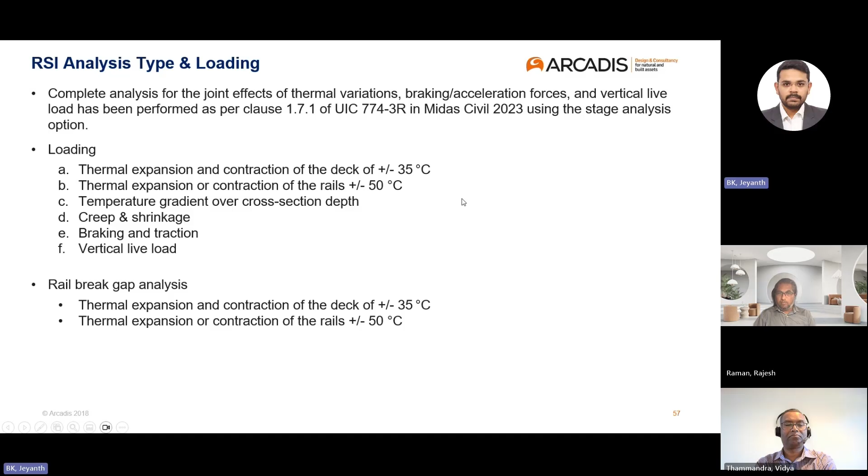The results show the maximum stresses in the rail were within the limit of 112 MPa, and as expected, the maximum stresses in the rail occur where the expansion length of the deck is maximum. That's at the movement joint location between the Curzon Street station viaduct and the transition span, where we had the maximum expansion length of the deck, and accordingly the maximum stresses in the rail, both tensile and compressive.

Apart from that, all the deck displacements were within the limits specified by Eurocode and HS2 standards. Once we get the substructure forces or additional forces generated due to this analysis, this is passed on to the substructure team for checking the substructure, which will be added into the thermal load combination.

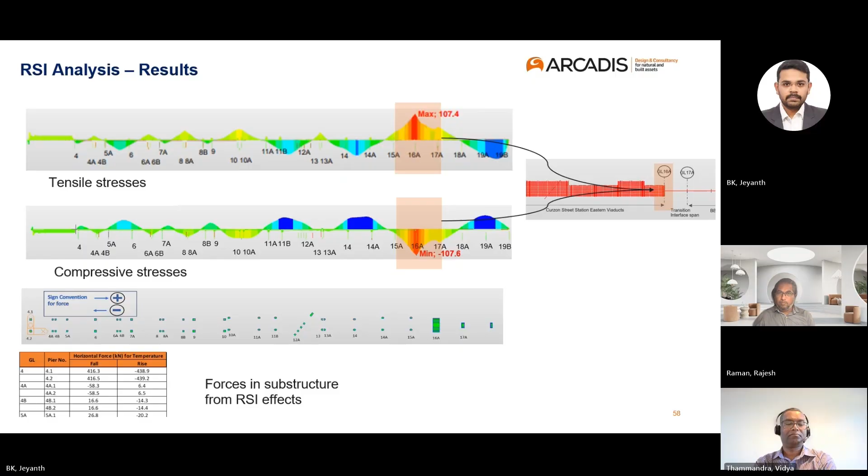Thank you. Now we'll be handing over to Vidya to cover the aspects related to the conclusion.

Thank you, Rajesh and Jeyanth, for an excellent overview of detailed analysis and rail structure interaction analysis, which formed a key part of viaduct design.

As you have seen, because of the number of span configurations, we ended up with about 17 different types of viaduct forms. So, along with grillage analysis, we performed a number of detailed 3D FE models.

We modeled pre-stress accurately because accurate prediction of viaduct displacements was critical for supporting the vertical transportation elements and building services.

All the stress checks in the pre-stressing beam were carried out within MIDAS, which was quite helpful. We wish we had done more automation in completing ULS design of all pre-stress beams within MIDAS, but there were some issues.